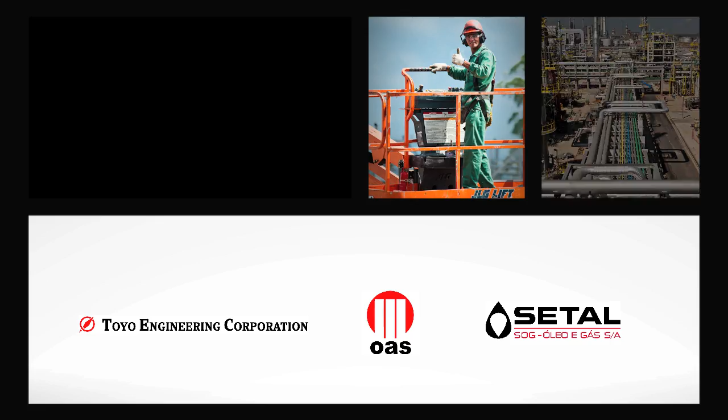Ecovap participated in the modernization project for the Henrique Lage Refinery in São José dos Campos, São Paulo, on the basis of an EPC contract, which included engineering, procurement, construction, pre-commissioning, commissioning support, and for the operation startup, all related to the building of 8 new units.

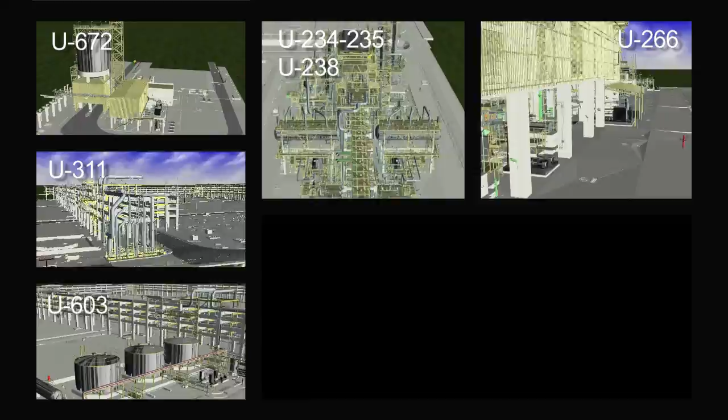The construction and assembly process of the units was extremely complex, but was carried out by the Ecovap team with high levels of competence, persistence, and commitment. The units were crude coker, coker naphtha hydrotreatment,

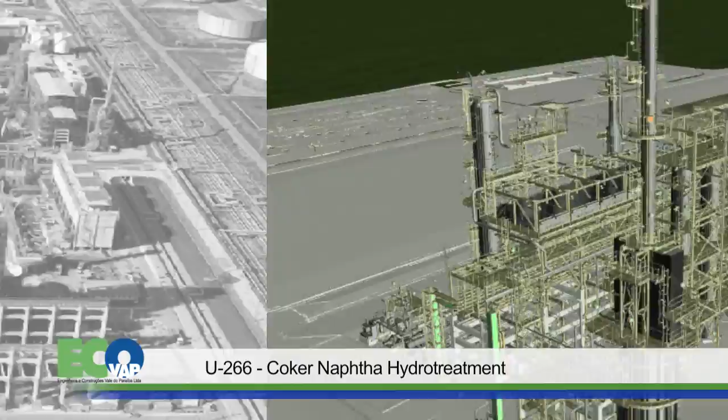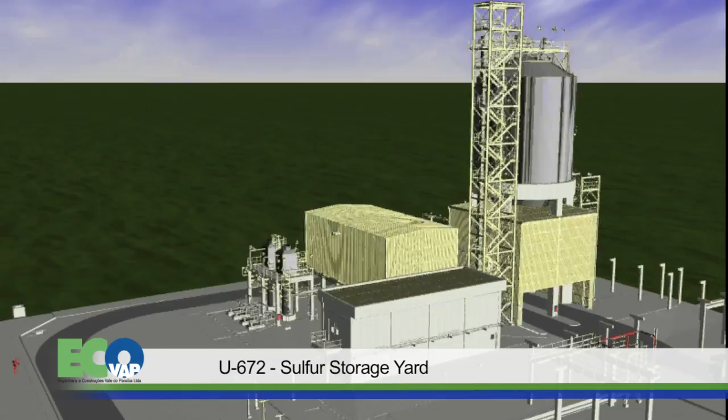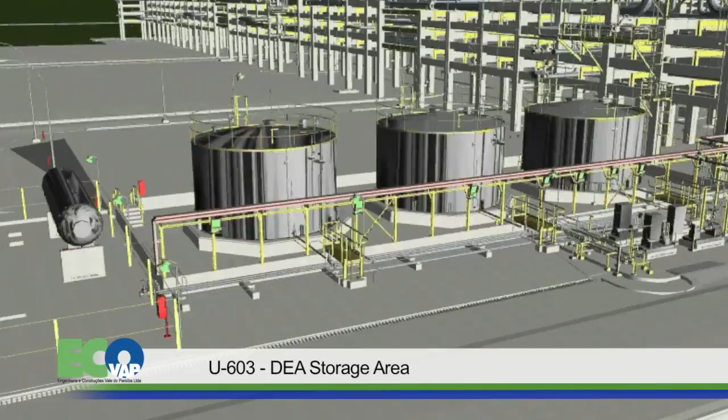sulfur recovery, 2 identical units, tail gas treatment, sulfur storage yard, DEA storage area, and interconnections.

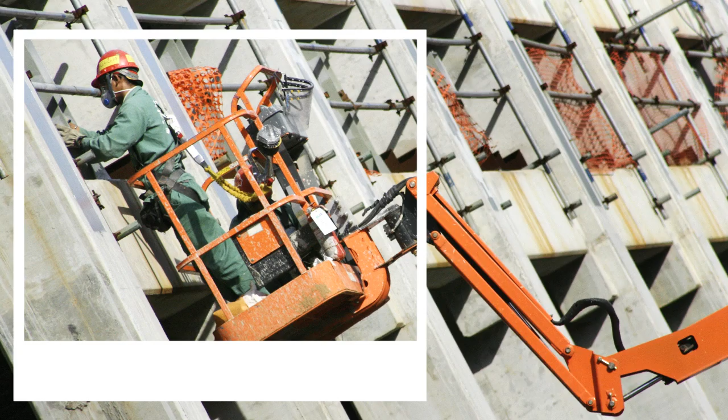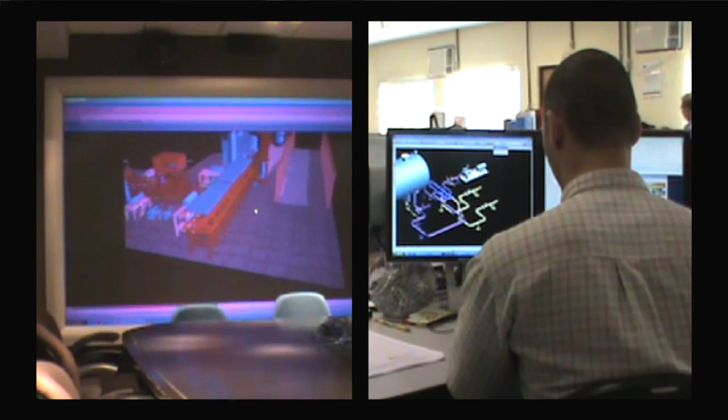Ecovap used cutting-edge technology in the form of the most modern software for engineering development, and through the use of a virtual reality room, which allowed the company to make essential adjustments to plans even before construction began.

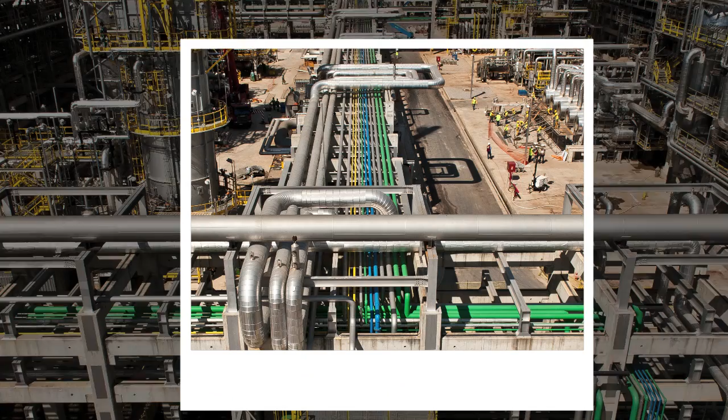PDMS was one of the main software used in the detailed planning of the project, including blueprints for piping systems, isometrics, and spools for the manufacturing of piping. Through the use of sophisticated infrastructure for engineering and materials on the building site, work commenced only 5 months after the issuing of the initial service order.

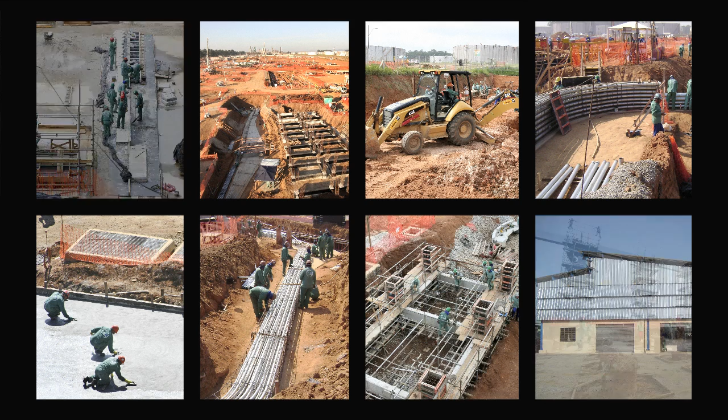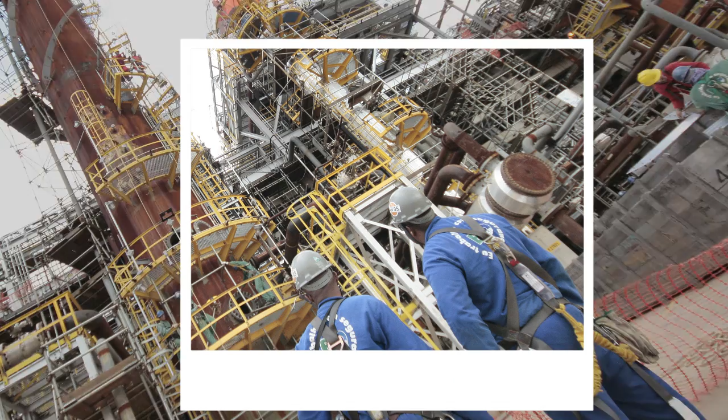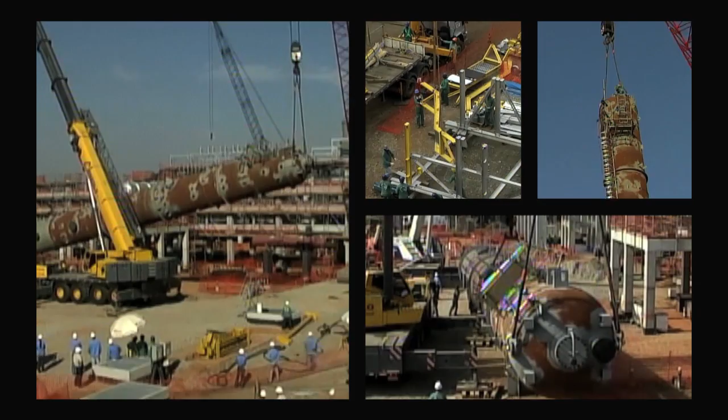The ability to make decisions rapidly and to take innovative and successful measures to get things done are major features of Ecovap's dynamic approach. The strategic decision to procure essential raw materials with a long time lag for delivery, even before confirmation had been received from manufacturers of vitally important equipment, was another reason for the successful termination of the project undertaken by Toyo,

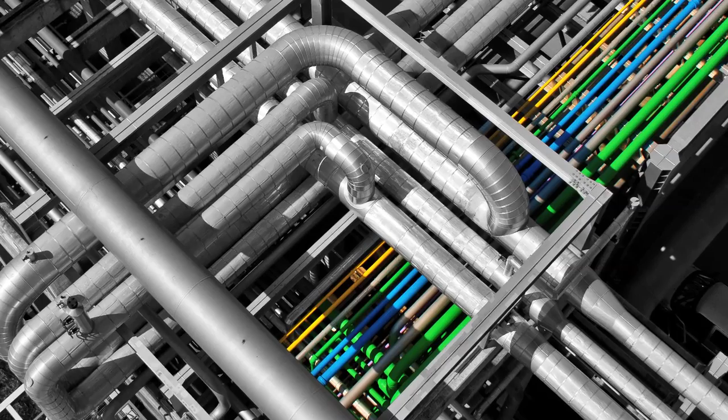OAS, and Setal. The resources used in the enterprise were 87% Brazilian as a result of the commitment to national economic development demonstrated by Brazilian equipment manufacturers and suppliers of raw materials, particularly in their use of the Brazilian labor force.

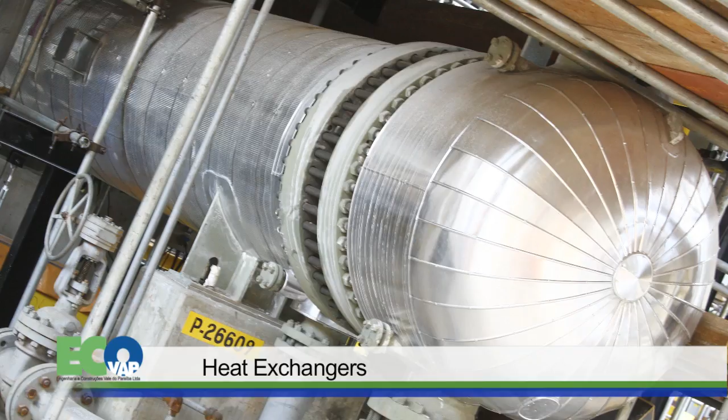576 items of equipment were procured for the project, including heaters, compressors, air coolers, heat exchangers, pumps, reactors, tanks, towers, and a pelleting machine. Most of these items were manufactured in Brazil, while some were imported from Italy, Japan, the United States, and Canada.

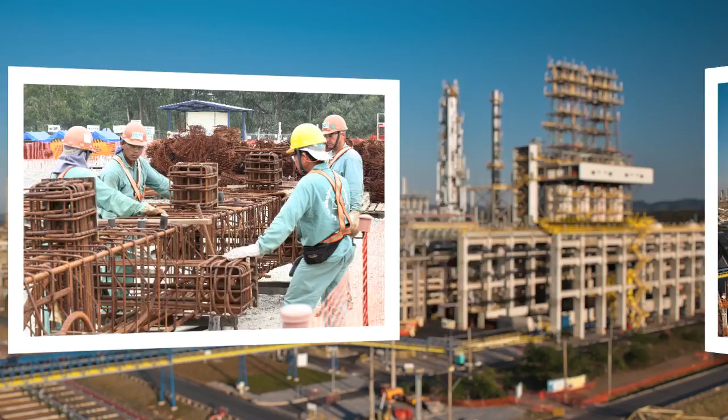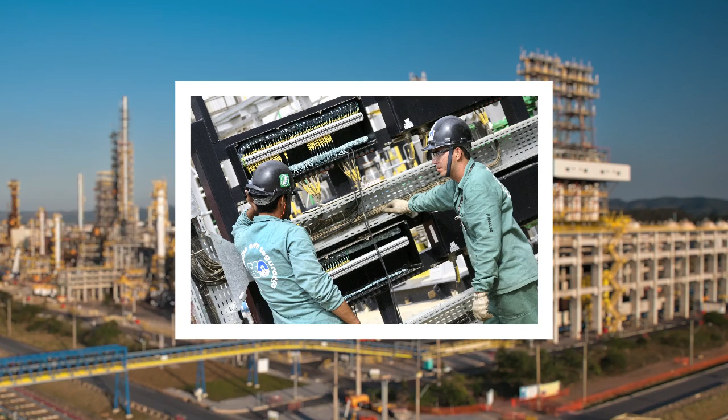The following statistics give an idea of the size and scope of the project. A constructed area of 83,748 square meters, 5,000 tons of building steel, 60,000 cubic meters of concrete, 5,000 tons of metal structures, 576 pieces of equipment, 6,000 tons of piping, 1,000 kilometers of electrical and instrument cables, over 7,000 instruments,

a pipe shop with an area of 5,000 square meters and 3 manufacturing lines, a building site with a total constructed area of approximately 28,500 square meters, 3 restaurants with seating for 1,600 people, a fleet of 89 buses and 50 other vehicles, a workforce of 6,000 at the project's peak, and a total of over 31 million man-hours worked during the project.

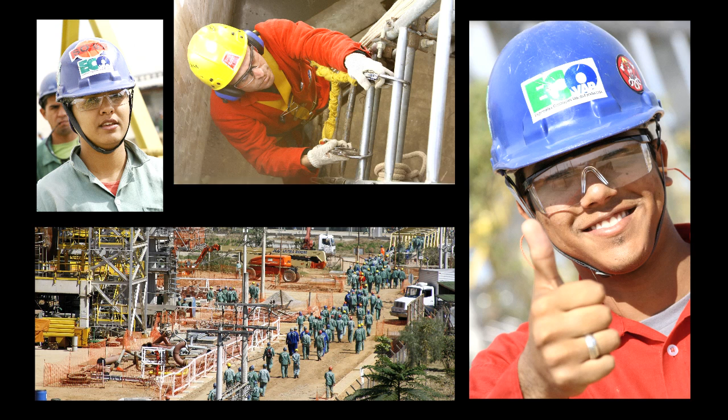Ecovap considers its 6,000-strong workforce to be its major asset because the capacity of a corporation is measured by its human capital. This firm belief in the prime importance of human relations was the stimulus for Ecovap's investment in over 1 million man-hours of training, specialization, the general education of both young people and adults, and in-house education and motivational campaigns, all of which reflect the company's commitment to a policy of social responsibility.

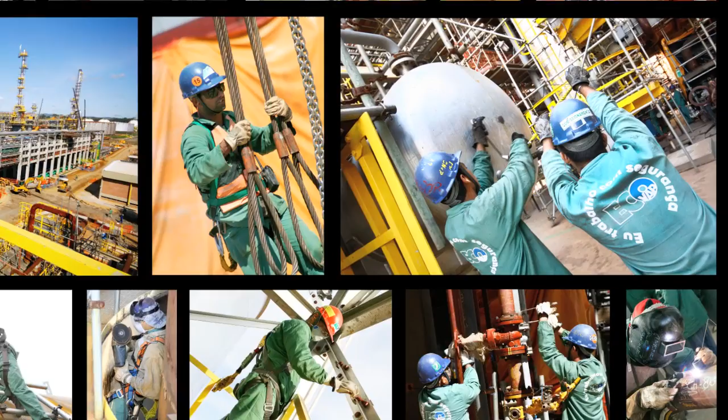As a result of this policy, Ecovap has always striven for continual improvement in its various processes and has gained international certification in the form of the ISO 9001, ISO 14001, OHSAS 18001, and SA 8000 diplomas. Ecovap is also proud of the fact that it reached a total of 7 million man-hours worked without any industrial accidents requiring leave of absence.

Ecovap believes firmly in human potential and invests in its workforce in order to enhance their social development. This is the essence of Ecovap's mission.

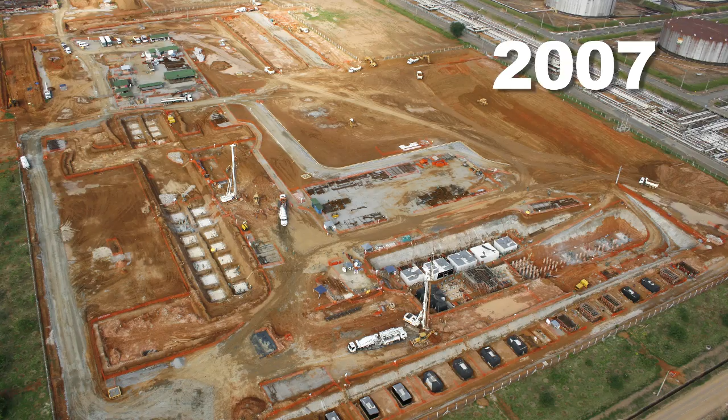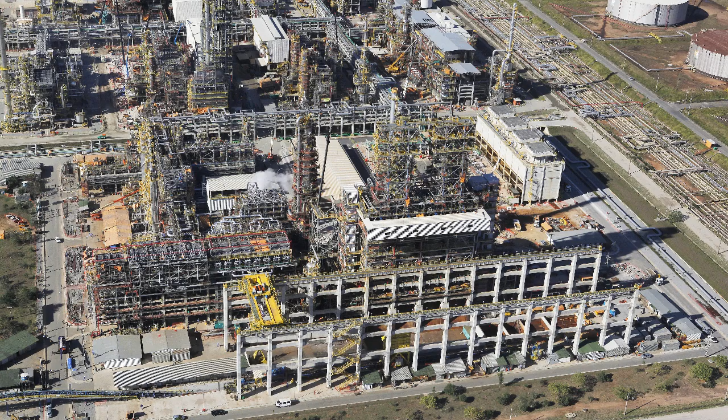When we refer to the scope of the Ecovap project, both the numbers involved and their corresponding challenges can only be expressed with superlatives. The 8 new units produced by Ecovap using an EPC system are highly complex and technically detailed.

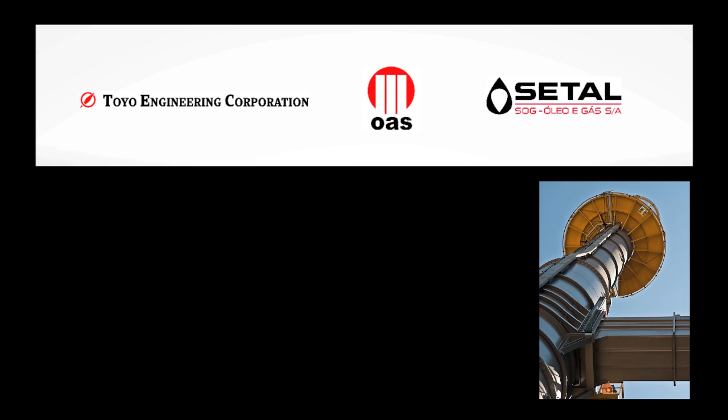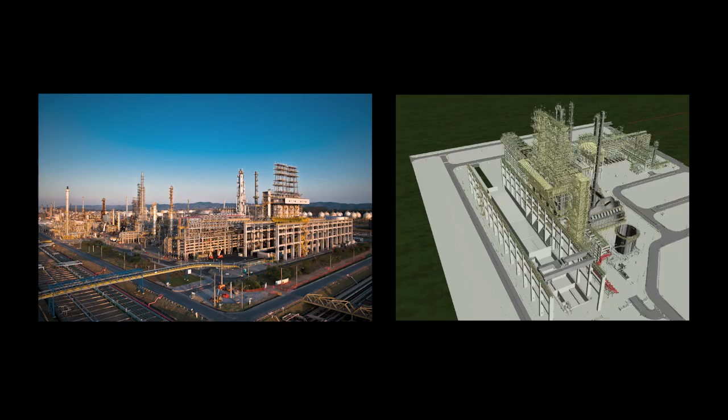The successful formula developed to overcome these challenges benefited from the added values provided by Toyo, OAS, and Setal, Ecovap's partner companies, which are excellence, commitment, persistence, responsibility, and competence. There was an unceasing search for different ways of overcoming the obstacles created by the complexity of the project.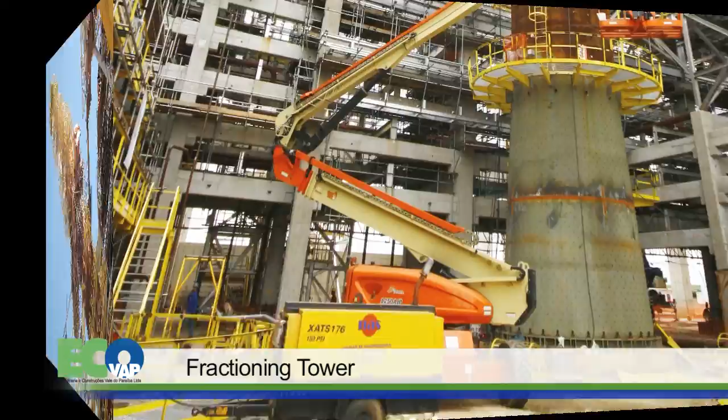Most of all, in the delayed coker unit, the largest and one of the most important units in the modernization process. For example, the logistical solution encountered for the transportation of the reactors and the fractioning tower was to divide the larger items of equipment into smaller parts. This involved upgrading planning and assembly processes.

In an area of 90,000 square meters and with a processing capacity of 5,000 cubic meters of vacuum residue per day, a variety of products such as butane gas, coke, and naphtha are obtained through this production process.

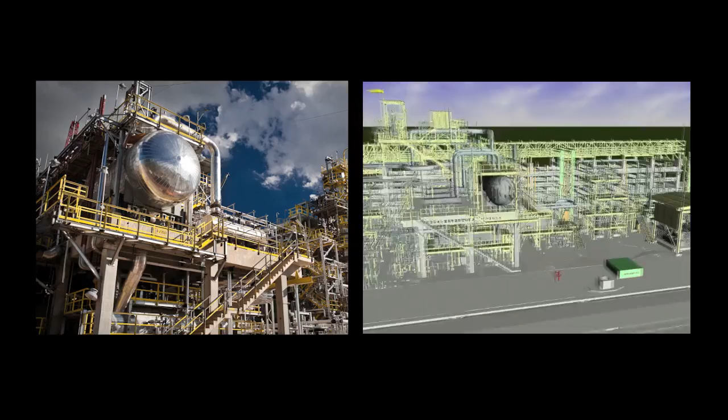The recovery of sulfur is undertaken by 2 identical units, each of which is able to treat 85 tons of acid gases per day. The final product of these units is liquid sulfur, which is then transferred to the pelleting unit. The tail gas treatment unit is unique and is able to process recoverable sulfur from both units at a normal rate of 170 tons per day.

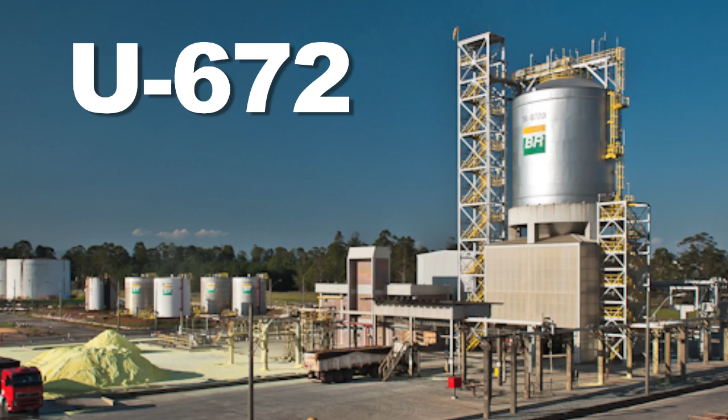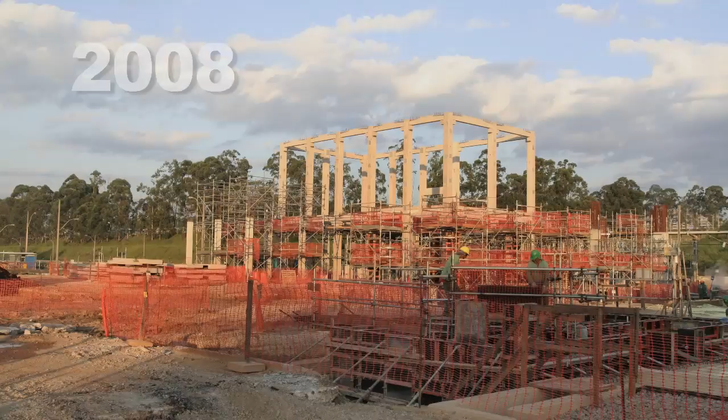The construction of the sulfur storage yard also involved overcoming a number of challenges, one of which was to build the new unit in the same location as the existing one while the latter was still in use. The new unit was completed in July 2009 and has a production capacity of 140 tons per day, transforming sulfur into pellets, which are placed in storage before being transported to the various industrial plants which use them.

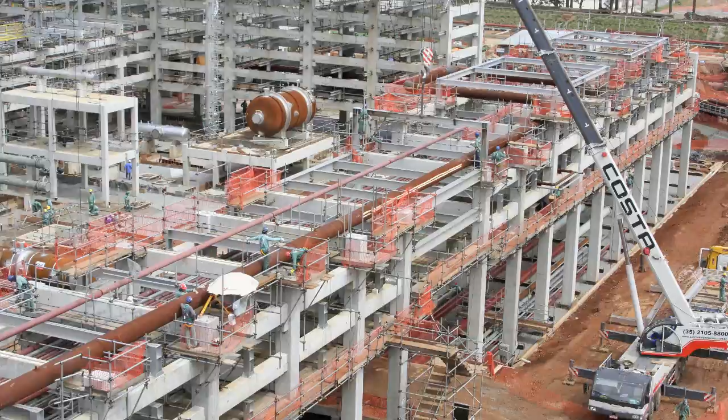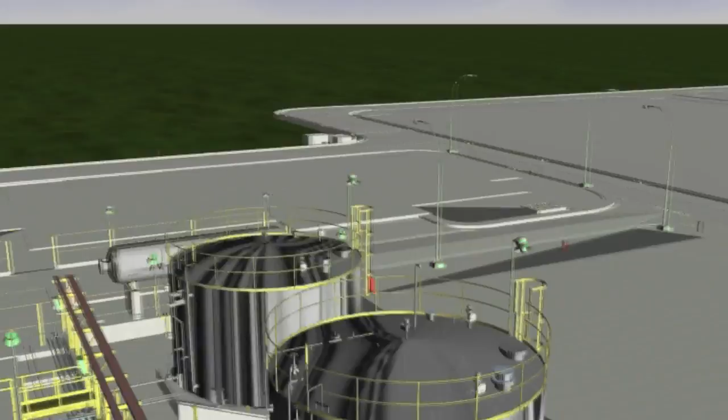Unit 311 is of paramount importance to the enterprise, since it is responsible for the interface between all the units involved in the modernization project. Unit 603 was one of the first units in the modernization project to be completed. It consists of 3 storage tanks for DEA, a substance which is used in the gas treatment systems.

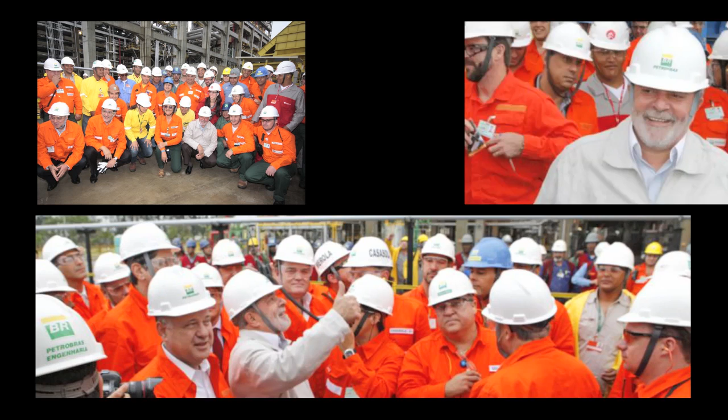On October 18, 2010, the delayed coker unit was officially opened by the President of Brazil, Luiz Inácio Lula da Silva. This ceremony celebrated years of overcoming challenges, achieving goals, and building success.